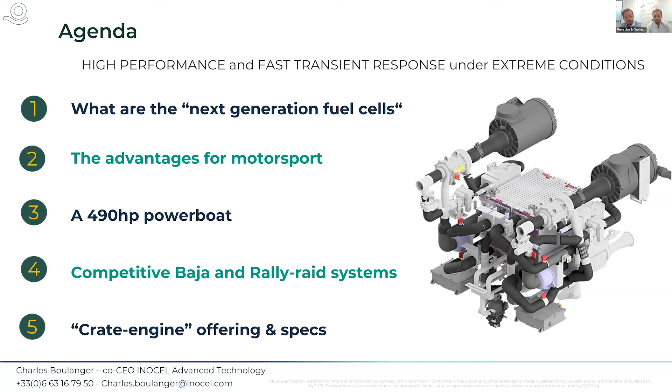So just a quick intro: the first two topics will be presented by Pierre, where we'll be able to do some comparison between fuel cell and also more conventional sources of energy. And then I will present the other topics. But just before jumping into the deep end of high performance fuel cell and motorsports, I wanted to share a brief introduction of INOCEL and its advanced technology arm.

So Pierre and I run the entity on the right called INOCEL Advanced Technology. We're very much at the tip of the arrow to spearhead any new activity around mobility and new sources of high performance systems, where we are owned by a company called INOCEL, who is a designer and a manufacturer of power solutions for power generation around fuel cell. So designing fuel cell stack, the balance of plant around the fuel cell, as well as providing gensets, so complete power generation to the market.

So our team on the right is very much focused on high performance. So we provide low volume systems to race teams, to OEMs for proof of concept for low volume series, as well as very specific vehicles. So to do that, we do a lot of integration work, a lot of system definitions. We have a team doing controls and system development. And of course, we can do a custom stack, so fuel cell stack and balance of plant.

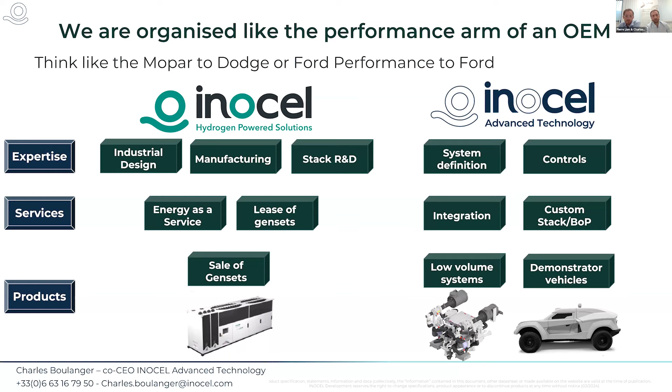So the markets we cover are numerous and very varied. So from powering festivals and data centers, as well as providing a very comprehensive solution for off-grid EV charging. So when you don't have enough electricity from the cable to recharge fast EVs, we provide a 400 kilowatt genset that converts hydrogen into electricity, and then you can fast charge your EV without any power sources.

So we deliver those projects from 3 different places. We are today sitting in our Gigafactory in Belfort, so top right of the map of France. We also have the R&D office in Grenoble, near the Alps, where we do all the stack design, but also balance of plant development. And Pierre and I work from the Cannes office, where we do all the system integration, high-performance vehicle development, and bespoke system.

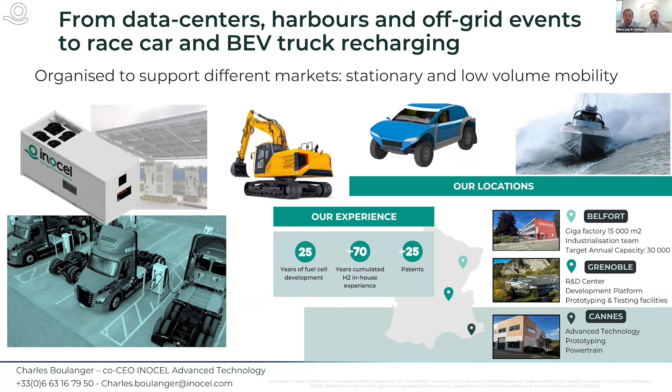So our customers are quite varied, from off-highway companies that want to have net zero diggers and tractors to run in places like the city centers, where you don't want to have pollution in the middle of the cities when you have construction work, to very specific vehicle. We'll talk about off-road, but also high performance powerboat. So we currently have a 490 horsepower powerboat using two fuel cell we developed.

So quick slide on if you're running events, you don't have any electricity from the cable, we can provide a solution, and that's what it looks like. It's a container, so 40-foot container. You plug hydrogen on one side and you have electricity on the side. So very good to run events in remote places, very good to power reliably a paddock, a new race event, new race series. So this is the core business of INOCEL.

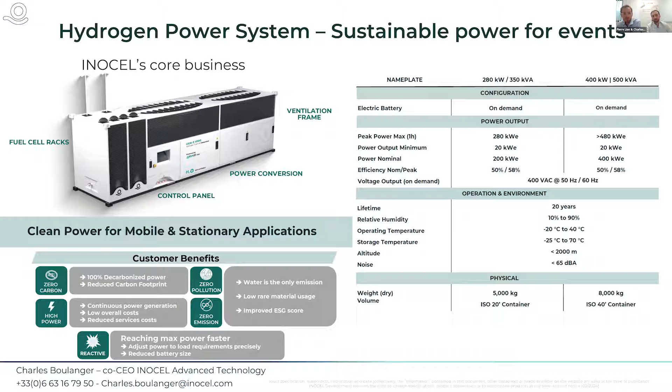But today we're more going to focus on how we use this core technology, so the fuel cell developed by INOCEL, to adapt them into more high performance application in mobility. So motorsports is a prime example for us. So yeah, I will explain a bit more the technology and try to do as much comparison with thermal engine, because I think it will remind a lot of memories for a lot of us. We are really at the early stage of the development of the fuel cell as a race tech.

So I will start just to compare the different levels of powertrain that we can have. As Charles mentioned, we are really starting from the stack level, meaning where the electrochemistry is happening, and we are designing and producing in-house the stacks. It can be compared a bit like the engine block and internals of an engine, meaning that the stack design and the cell design is quite like combustion chamber design. And it's fairly easy to understand. As much gas and as much air you can push into the stack, more power you have, and better the flow is inside of the stack, easily you can make power.

The other stage is balance of plants. So it's really just all the auxiliaries that you have around the fuel cell to make it run. So compressors, injectors, water pump. So really the close tech around the stack to make it work. So it's kind of a crate engine solution. You choose the auxiliaries to supply the stack in hydrogen, air, cooling, and you have an ECU like on a thermal engine to run all the auxiliaries and make sure that you provide the good amount of gas to make the power you want.

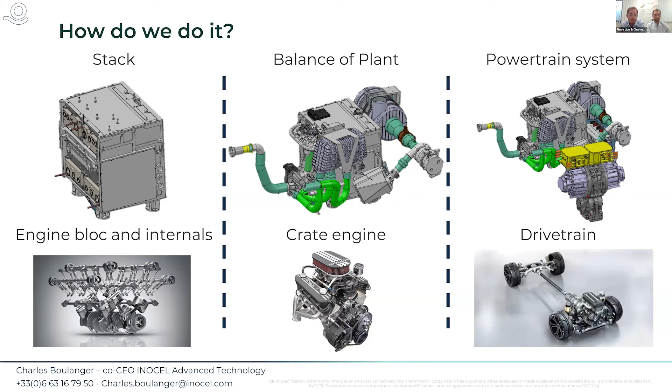So where are we right now, and what do we have? The current technology that is fairly used on the road with OEMs like Toyota or Hyundai, it's fairly small units of fuel cell. The power density is okay, but we can do better. One key aspect is the response time, meaning that the last generation of fuel cell is not able to flow that much. So it's hard to push hydrogen and gas into it. So it will be really, let's say, slow to respond, around 6 seconds to go from idle to max power.

And based on that, you need an electric battery to act as a buffer for the fuel cell. So it means that you have heavy hydrogen tanks to store the hydrogen. You have a fuel cell that is a bit small, and you have a big battery. So meaning a lot of weight, which is not that great.

The next gen and the technology that we have right now is totally different. Let's say the smallest unit that we have is 100 kilowatts. The second smallest unit is 250 kilowatts. And that's, let's say, a standard, but we can still push a bit more. I will explain why. So in terms of power density, it's way better than before. And we have the capability to have a high flow system, meaning that between idle and max power, it's less than 2 seconds. So in terms of dynamics, it's a game changer.

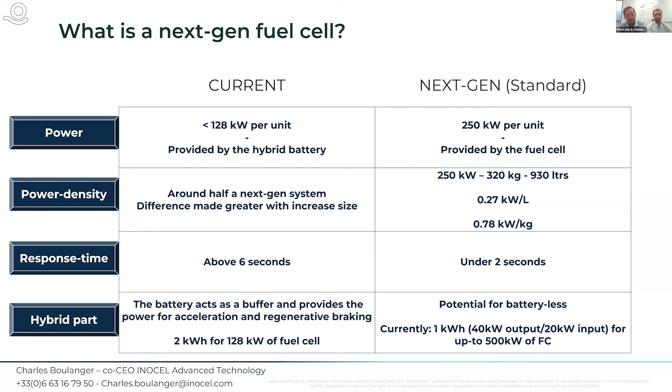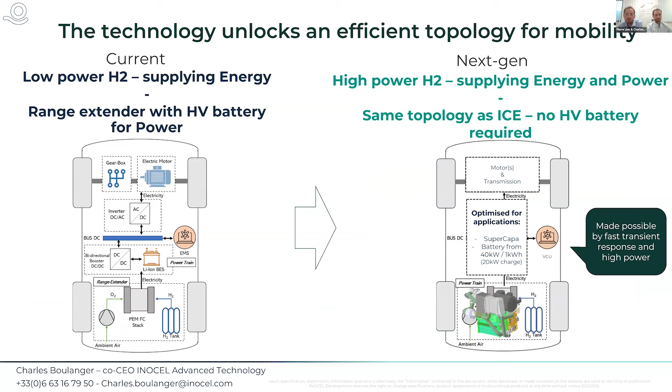So this is just a repeat of what I already said, but the main difference is, and this is the key, the technology of the fuel cell with the next gen clearly changed the way you can design the overall architecture of the system. And we make totally different architectures with way less weight than before. So for race application, it's clearly a game changer.

Now I will try to explain a bit with Charles what are the key advantages and compare it to other, let's say, green or greener solutions. So first, we thought it was quite important to define what is a high-performance powertrain. So when you build a race car, when you go into a new racing series, when you want to compete, you want high power. That's the key. That's why fuel cells in the past were really, really lacking.

Then you want it to be quite compact and light. So aerodynamics is key for a lot of series now. You want it to be light because we know weight is the enemy of performance. It affects handling quite drastically, and it involves bigger brakes and so on. The system becomes very complex. So responsiveness also was lacking from all the net zero powertrains, but battery EVs.

So responsiveness was a big issue, the response time for fuel cells in the past. And now with the latest development over the last 3 years, we broke this one. So now we have a fuel cell that is very reactive, that we can integrate in a vehicle like an ICE, so like a combustion engine. That's what we meant by easy integration.

You want to have a simple system that provides energy and power that is easy to fit in a car. Having to have a small fuel cell, a battery, electric motors, tanks is cumbersome, whereas we come as a straight replacement for the ICE engine. You will have a fuel cell that provides the power. You will have tanks of hydrogen that provide the energy, connected to a motor, and then the wheel.

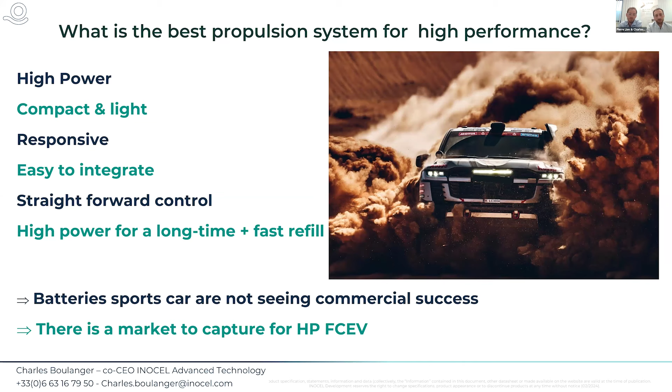So we saw on road car applications, high performance sports cars, hypercars, powered solely by batteries, it has become a big issue to get customers to buy them. So they are expensive, they're high performance, but not for long, and therefore customers are not interested. Customers still want the noise, still want the thrill, and also the range. And we believe those are the criteria for a high performance powertrain that we can provide here. So we think the next generation of net zero powertrain using high performing fuel cells with fast response rate is the way to go.

Just to explain a bit more with data, I will not go into more detail. I will try to explain a bit the data. You will have plenty of time to review that afterward. But one key driver right now when you are designing a road powertrain is emissions and total cost of ownership. It's clearly what drives the market. Emissions, because you have regulation, and TCO, because it's still money at the end of the day.

What we can see, trying to compare battery systems, fuel cell systems, H2 thermal engines and synthetic fuel thermal engines, is quite interesting because battery is clearly the best way to have a low TCO as long as you can achieve the application targets. And usually range is clearly an issue. But otherwise, the overall efficiency is great. Batteries nowadays are not costing a lot, but if you don't have the range, it's clearly an issue because anyway, the power and the energy stored in the battery are totally linked by design. You can't go above that. It's physics.

But you can have a good example. It's almost impossible to beat an electric vehicle at Pikes Peak because you don't need a lot of energy and you can have big power. So for Pikes Peak, no way to go better. But for the Baja, almost impossible with a battery because you need high power with a high range. So if you have an application that can't go with battery, what are the other options? You have fuel cells, H2 ICE, or synthetic fuel. In that case, the power is not a limit. The range is how much tank you can have in your system.

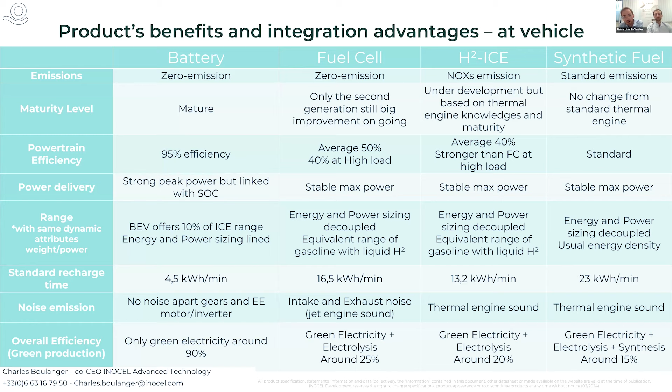Now we will focus on a few applications that we developed or have under development. I will start with a power boat that we developed 2 years ago. A small boat, 8.2 meters, 500 horsepower, only using fuel cells and a small battery. So the kind of architecture we showed you. The goal of that project was to see, without changing the hull of the boat and without too much trouble, how to replace a Mercury V8 6.2 liter with green technology. And it's working well. We have the same weight ratio and the same weight as the thermal boat, a bit more power, so the dynamics are almost the same.

We have 75% of the range of the thermal engine using gas at 700 bar. We already know that using liquid hydrogen instead of gas could bring a lot of range and almost exceed the range of the gasoline version. So it's a really nice project that we developed in-house: full integration, fuel cell development, testing. It's not proven, because nobody is taking speed records right now on that kind of boat, but we reached almost 60 miles an hour with it.

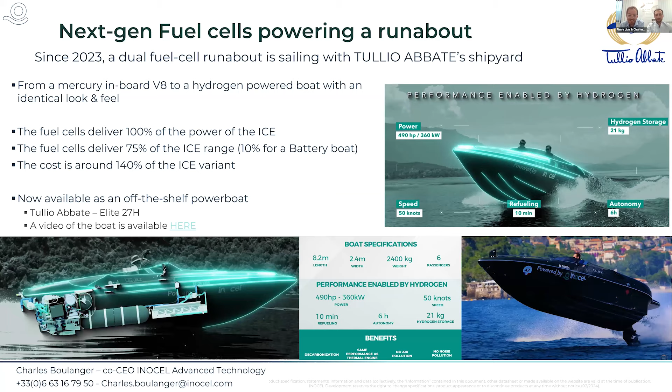Thank you, Pierre. So yeah, I will talk about this second application, which is close to my heart. So, Baja and Rally. Over the years, we developed a very interesting concept. The company was initially started by Mike Horn, who wanted to do the Dakar with a net zero powertrain.

So we contacted the French Atomic Energy Center that designed the core fuel cell that we are now using after further development. So initially, the company was already using a core fuel cell that's designed for motorsports and rally raid for the Dakar Rally. But over the years, we also have a team and partners that really developed a very strong expertise in this area. So today we have a very strong focus on this kind of application.

Why? First, because we'll be racing in an area of natural beauty. So you don't really want to come with a dirty machine that leaves the place in a worse state than you found it, and you go there because it's a natural beauty. You want to enjoy it. You want the others to enjoy it. You want your child to enjoy it. But you want also to go racing and have fun. So that's a big driver for us. Going racing, Baja, rally in a green, sustainable way is what drives us.

Then the power, as Pierre mentioned, we have enough power from the system to have a race car that shifts, that crosses dunes, that is light enough to do so in a safe way and fun way. Then the energy with liquid hydrogen, we really believe this architecture will be very competitive over the coming years, not decades, but years. We'll be able to have a powertrain integrated well into a racing chassis like a T1 and go for top positions and finish in good position by racing with sustainable fuel like green hydrogen.

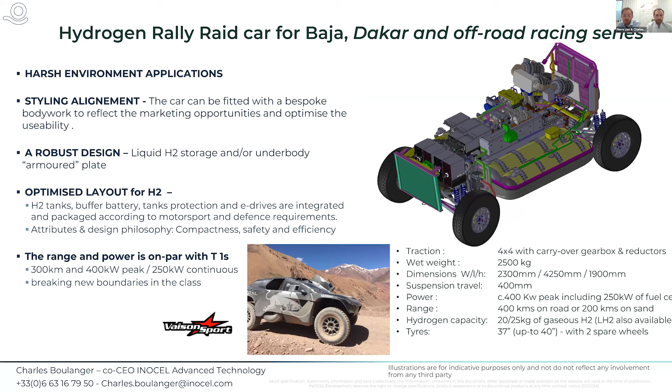So now, if you want to get on board and share the vision, we have a couple of very interesting delivery models where again we bring something new to the table. So what we decided is it's possible now, with the technology we have, with the maturity of the supply chain, the availability of hydrogen that's become more and more widespread, that we can deliver a hydrogen fuel cell balance of plant or system as a crate engine offering. So really, we will be able to provide this system with the integration packs, so it can be integrated in a vehicle with slight modification.

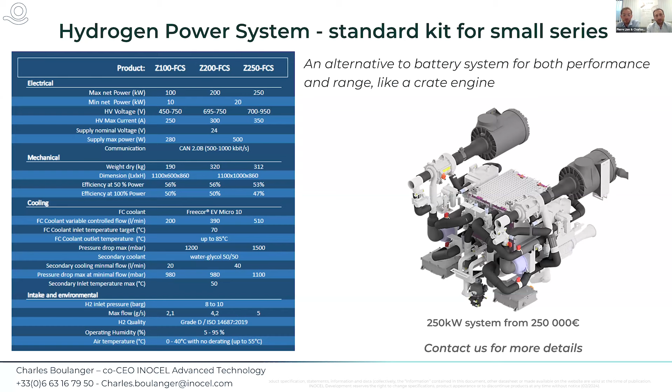So what we call is a gray box approach, where we can move some components, help with the integration, go as far as upgrading the scope to provide H2 storage, helping to spec the powertrain, motors, and transfer box. So that's kind of a crate engine, which is ideal for small series, and it's based on a current off-the-shelf internal. Available is 100 kilowatt, 125 kilowatt, or 200 and 250 kilowatt. So two different sizes of engine, and two different stages of tune for each.

And then if you want to go racing a bit faster, a bit further, if your requirements are a bit more aggressive, if you want to push the boundaries, we offer a kind of race engine development support, where we take the initial design, the core design, the parts produced for mass production, and we optimize every single one of them or some of them to provide more like a race engine kind of offering, where we can change the size of the internal as well as the intake, exhaust, and be able to push the boundaries and provide the net zero powertrain to go racing further and faster.